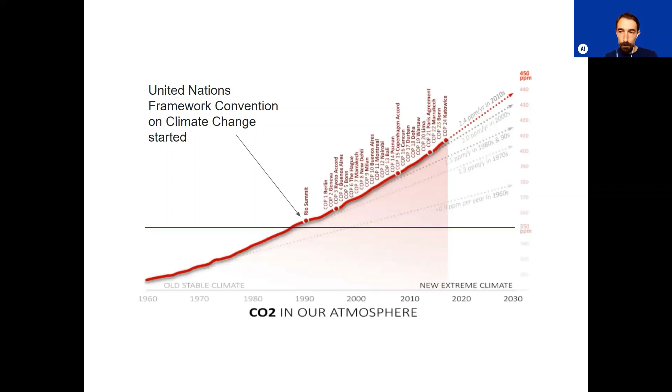So we've known for a long time, and after the Rio summit, the world's governments came together and formed the COP process, which is the Conference of Parties, attempting to reach some sort of international agreement to address this problem. And you can see that as these various COP meetings have happened, the concentration of carbon in the atmosphere has continued to rise on an exponential curve. So not very promising. And obviously we've seen some pretty terrifying effects of this, particularly over the past 2 or 3 years, and a palpable sense that political leaders are not dealing with the severity of the situation.

So in terms of architecture, there have been groups that have been active on this for more or less that same period of time that we've had the scientific consensus understanding of the problem, going back to the 70s. But they haven't had the kind of mainstream cut-through that will be needed for a wholesale transformation of society, really. So that was the impetus for starting a group like ACAN.

And initially we were quite inspired by Extinction Rebellion, also known as XR. In April 2019 in London, XR really almost came out of nowhere and put the climate emergency on the media agenda, on the political agenda, and did that in quite an effective way that's really almost unprecedented on this issue. So a few of us started having meetings over that summer, thinking about, could we have a group that takes some learnings from XR, but brings that activist approach into the profession, into our industry.

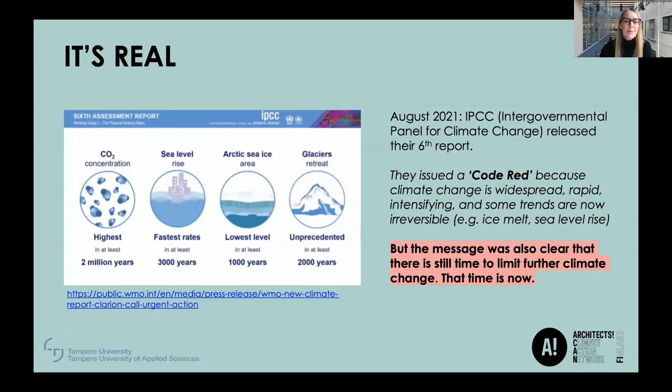Oops, for some reason, slides are not moving. Oh, okay.

The next reason why everything needs to change is because it's here, even in Finland. So climate change is already with us. For example, in Finland, we have already seen a 2.4 degrees Celsius rise compared to the industrial age. And globally, we're already at 1.2 degrees Celsius. And remember, we're trying to contain global warming to 1.5 degrees C. So we're not far off. The reason with Finland is because the Arctic, and also around the equator, is differently affected. So the global warming effect isn't even across the whole world. And so particularly in summer, there's an expected rise of 3 to 4 degrees Celsius by the end of the century, and as much as 8 degrees in winter. And we've already seen in some seasons 5 to 6 degrees in winter.

I'm having some trouble. I wonder if this is my end. When I click, nothing happens. Okay, let's see if my, yeah.

So in Finland, not just warming is an issue, but it's also a combination of changes. For example, we've also got an issue with sea level rise in the south, but because of the retreat of the heavy snow and the ice caps since the glacial time, the country is still slightly moving up. So Finland and the Nordic region aren't massively affected by rising sea levels, because the land is still slowly going up as sea levels rise. So they offset each other a little bit. But of course, in the southern region and around the archipelago, that's where we will actually have territorial loss, even in Finland. We are also facing superstorms, same as other areas in Europe, and they will increase and also raise the water level.

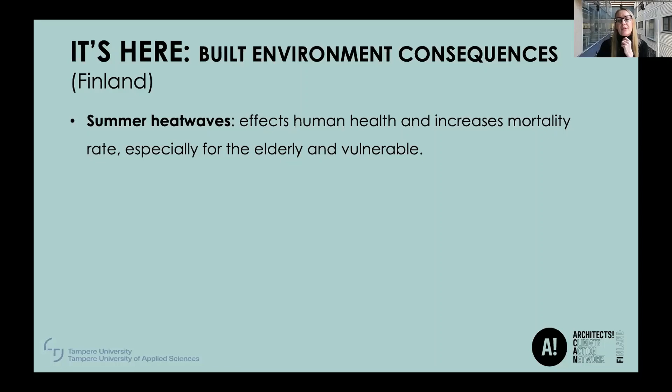And so what are some of the built environment consequences? Well, obviously, if there's summer heat waves, it affects human health. It also increases mortality rate, especially for the elderly and vulnerable, and even in Finland. And that's just because a lot of our buildings aren't really designed, and often people don't know really what to do. So I think it was in 2018, there was around about 300 excess deaths in Finland alone. And in Europe, there were several thousands from the heat wave.

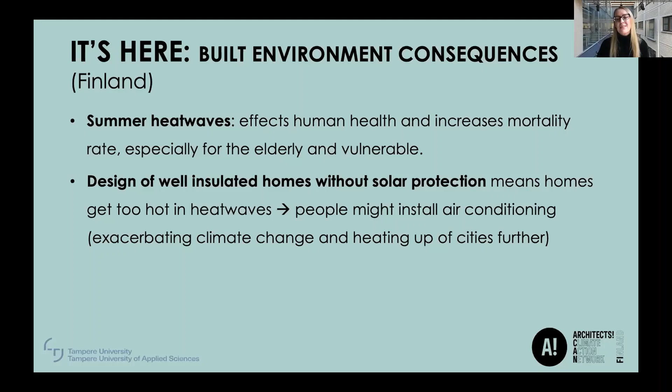And so, as I said, we have these well-insulated homes because we have the cold winters, but often we don't have solar protection. And that means that then you have a lot of sunlight coming in, and then the homes get too hot in heat waves. These are also issues that are actually observed in Germany and in the UK as well. And so then as a result, people might either be uncomfortable, their health suffers, or if they can afford it, they might install air conditioning, which then further exacerbates climate change and then heats up cities further as well.

Other consequences: when we have wind-driven rain, which in Finland isn't at the moment a huge problem, but if that happens and it keeps a facade wet for longer, and it's not designed for that, and of course, also internally, a more humid climate increases moisture problems. It can lead to mold growth, transfer of damp coming into the inside, that then also affects human health and well-being.

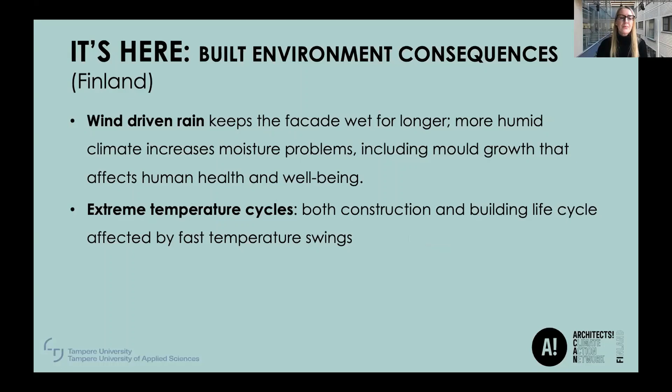The other thing is also when we have these extreme temperature cycles, so when we have very fast sort of freezing and thaw cycles, not only actually when you have ice on the roof, when it melts, it creates ice, it's heavier, and that then creates potential structural issues, but also it really affects actually the construction and building life cycle with these fast temperature swings.

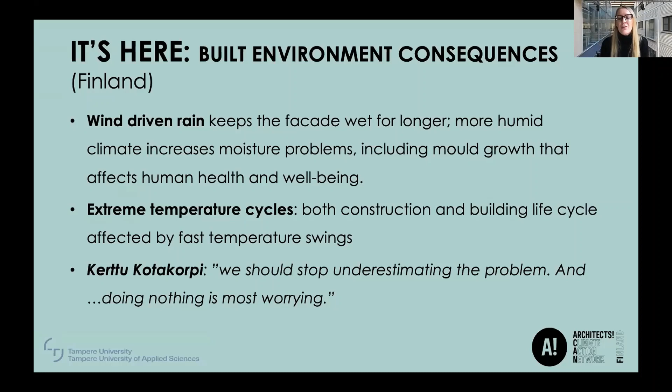And so Kerttu Kotakorpi said we should stop underestimating the problem, and doing nothing is most worrying. And so she was really pulling the alarm bell as well here in Finland. And so it's clearly urgent. It's basically real, it's already happening, it's with us, and it's urgent. The IPCC said that unless there are immediate, rapid and large-scale reductions in greenhouse gas emissions, limiting warming to 1.5 degrees C will be beyond reach.

The other thing is, of course, is at scale. We have to really act at scale. I mean, Finland has announced they want to be carbon neutral by 2035. As Tom was saying, in a way, these far away kind of deadlines don't make a huge amount of sense, because then we don't do anything and we think we still have plenty of time. We have to really cut now.

Of course, 2035 is actually now only 14 years away, and every single country, continent needs to actually move towards this carbon neutral society, and it's across all aspects of society that are impacted. As you probably have seen these numbers before, 36% of carbon emissions in the EU are associated with the built environment, and countries cannot be carbon neutral without also the built environment urgently transforming.

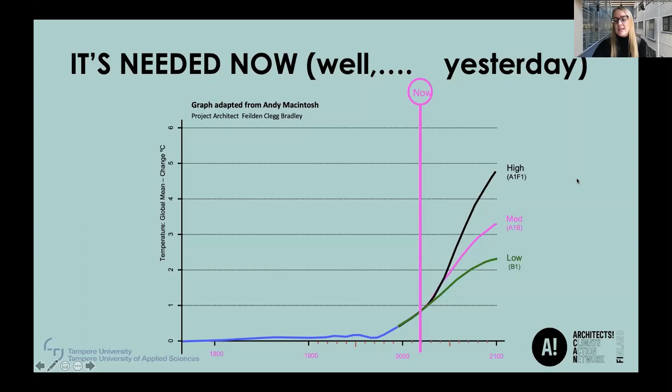At the moment, we are actually hitting at the end of the century high to medium high global warming, and that means somewhere up to between 3 to 5 degrees Celsius rise. And we're obviously trying to keep it below this 1.5 to 2 degrees maximum, and that's because that's the estimate that then the West Antarctic and Greenland ice sheets would not be melting, because when they do, that will give us 3 to 7 meters sea level rise, affecting huge amounts of people in coastal regions, and yeah, it's really severe.

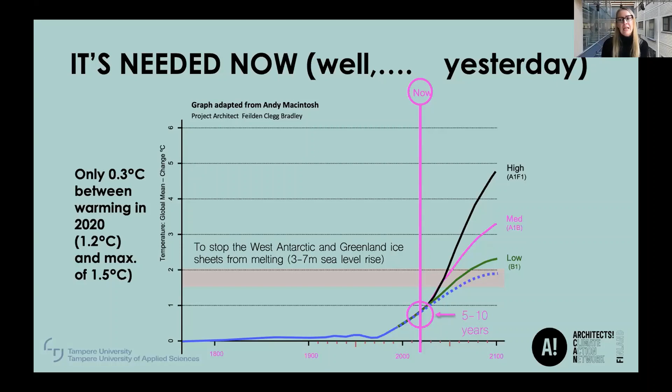So this is what we're really trying to do, to stay below this 1.5 to 2 degrees Celsius, and we just have basically no real time to act. We have to really do things now, not in the future anymore. And as I said at the start, if we already have global warming of 1.2 degrees Celsius in the last 100 or so years, there's only 0.3 degree difference between that warming, and this was in 2020, to not hit our ideal maximum of 1.5 degrees. So we really have to act now. And that's because we can still shape the future as well.

And then one other really important reason why everything needs to change is that we have global responsibility. So we have this global responsibility, each of us as individual citizens, but also as architects, because the decisions we make, whether it's material specification, whether we're going to demolish or build something from new, how much energy will be needed by people to use the building, all of that actually affects people and other species thousands of miles away. So the impact we have from decisions in Europe, in Finland, in the UK, and wherever you're calling from, actually has an impact on other people.

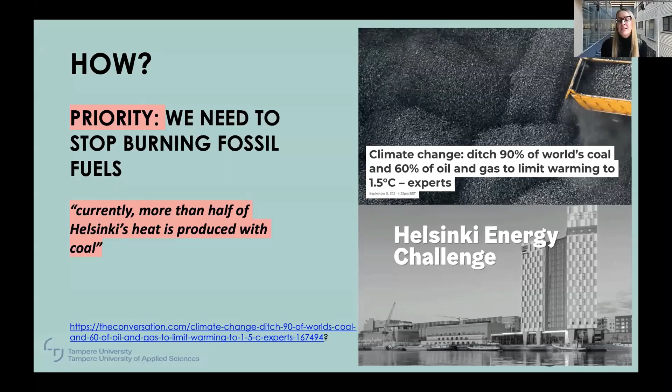And this top image, actually from yesterday, shows you that scientists were saying that we need to ditch 90% of the world's coal, 60% of oil and gas to limit warming to 1.5 degrees Celsius. And of course, that also includes transportation and so on. And that's why we have this focus on energy and carbon.

Operational carbon means building energy consumption, which is still the majority of where the energy and carbon emissions are associated. And then we've got embodied carbon, which is 10 to 30% of the building's footprint. Of course, if we're reducing operational carbon, proportionally it will become more important and will go up. Briefly, embodied carbon is that for the extraction, manufacture, transport, installation of construction materials, but also maintenance, reuse, demolition, end-of-life issues, and so on.

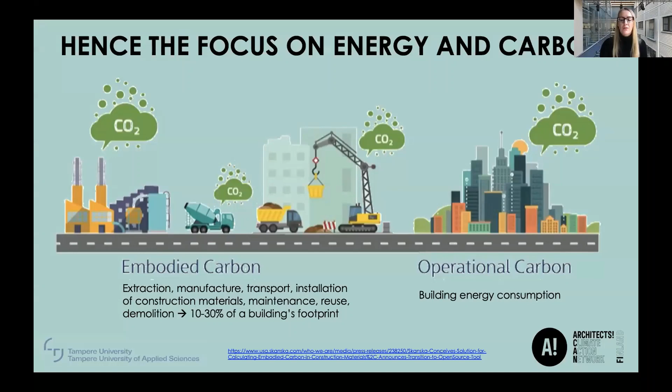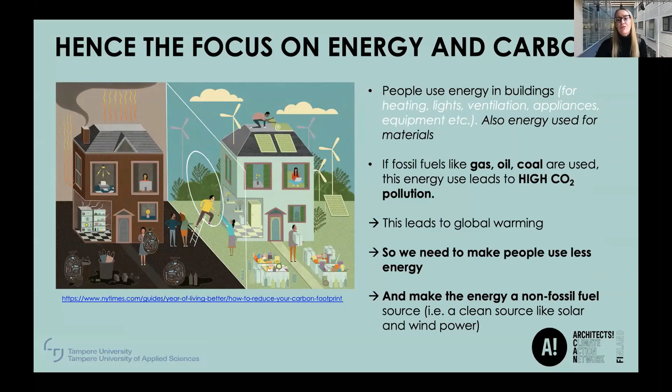So clearly, people use energy in buildings, but also for materials, and for heating, light, ventilation, appliances, and so on. And if we then use fossil fuels like gas, oil, and coal, then we end up with this high carbon emission pollution. And that then leads to global warming. We need to make sure that people use less energy, and then make the energy a non-fossil fuel source, so a clean power source like solar or wind power.

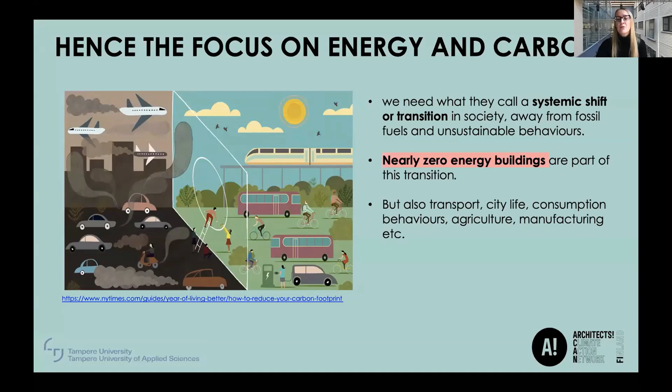And that's why we're referring to this systemic shift or transition in society that's needed. It's really a whole move away from fossil fuels and unsustainable behaviors. In a sense, we are addicted to fossil fuels because everything we do is based on fossil fuels, even a lot of the clothes we wear, not only the manufacture, but even the products they contain. Nearly zero energy buildings are part of that transition, but we're also talking about transportation, city life, consumption behaviors, agriculture, manufacturing, and so forth. So it's, as I said, across the whole of society.

But what's also really important is if we're really trying to avert the climate crisis, of course it is all about CO2, but it's actually about more than CO2. I would like to use this quote by Lance Hosey, an architect in the United States and the author of Shape of Green, which I highly recommend you read. He says: imagine a day when we've perfectly solved the challenges of energy, resources, and emissions, and everything we do and make is clean, harmless, and infinitely renewable.

Is that enough? The point he's making here is: what are we trying to preserve? Why are we trying to preserve our happiness, our way of life? How can we do that in a clean way? And if we are only preserving our subsistence and our survival, maybe that isn't enough in itself. So that's why it's also about more than CO2.

So as we're transitioning to this carbon neutral society, it's really important that we also take into account all of the other aspects that matter in life and that give us the society that we have. And so energy and carbon reductions on their own are not enough. Yet at the moment, that's really what we're focusing on because it is so utterly important because of this climate crisis that we're facing.

But there's other issues. Of course, we need to adapt to climate change, but we also shouldn't forget about daylight and the health and well-being impacts from that. Also, the finite resources that we end up using, including the waste that we create and the water that we use, not just materials.

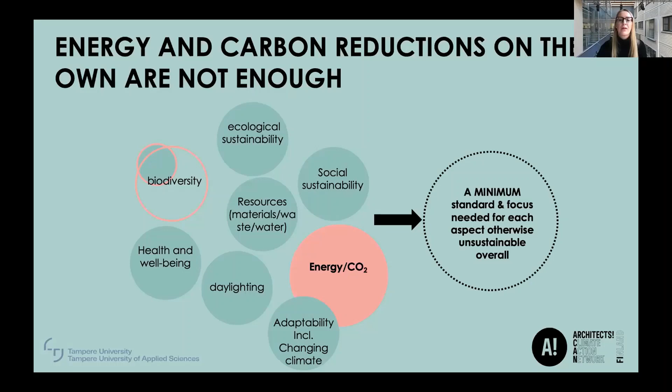We've also got social sustainability to consider, ecological sustainability, and of course also biodiversity. And there's many more of these issues. And as I said, most of the time we really focus on energy and CO2. And while we can prioritize energy and CO2, it's not okay when we then reduce high standards elsewhere. So it's actually not okay when, for the sake of energy and CO2, we neglect biodiversity or health and well-being. So we need this minimum standard and focus for each aspect, otherwise it's unsustainable overall.

We not only need to think more holistically, but we also need to think more restoratively. So it's really about undoing some of the damage of the developments we're currently creating, but also some of the past damage. There's also another reason why it's always good to think restoratively and try to create this positive change, because we're finding that a lot of proposals, buildings and developments that we undertake don't actually perform the way we expect them to. In reality, they perform worse. So that also gives us some kind of safety margin, but it's also about really offsetting previous damage that we've done.

And again, some of my students have seen this before. If you're here, my apologies.

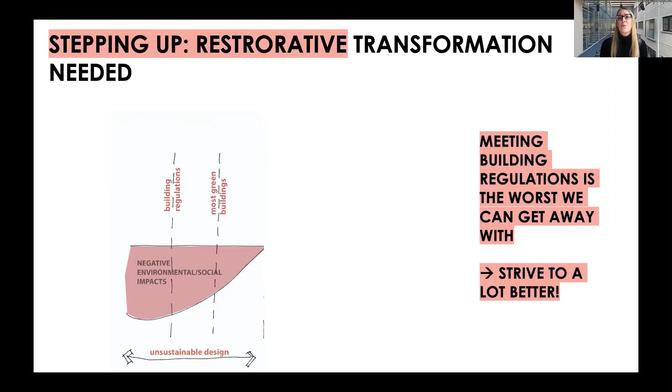But I really can't emphasize enough that often in the last 10, 20 years we talked about small changes we would make, and we'd say, oh, let's aim for 10% better or 25% better than the building regulations, and we call it a green building. But if you really start to look at those buildings and study them, they're more sustainable than others, but they're still an unsustainable design because they usually still have negative environmental and negative social impacts as well. And of course, building regulations are the worst we can legally get away with. We need to do a lot better than them and strive for a lot better.

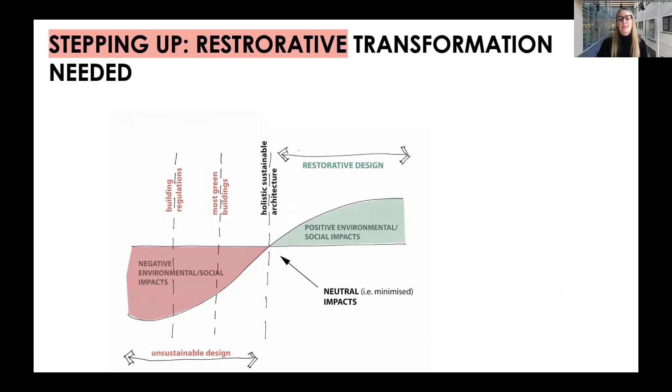So where we have sustainable architecture, we've sort of neutralized and minimized the impacts. But really where we need to go is this restorative design where we have positive environmental and social impacts. And we try to, as I said, offset some of the past damage and try to repair and restore. I've been referring to it as super architecture because we're asking a lot here. So super architecture is really design that can support or hinder sustainable behaviors and lifestyles. And I think when we realize the power of design to really nudge our behaviors, that's also when we move from climate anxiety into positive climate action.

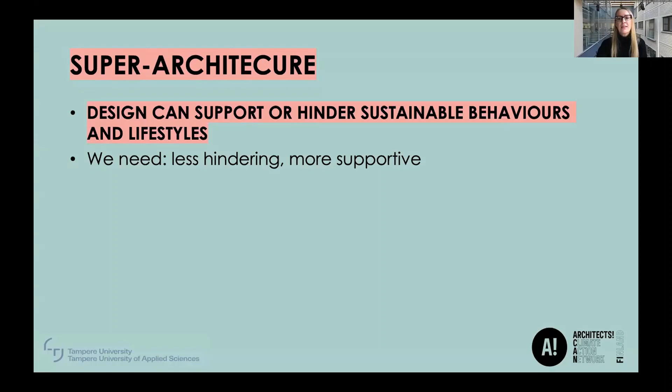So we need a lot less of this hindering, where architecture might hinder sustainable behaviors and lifestyles, and be more supportive and more restorative as well. And there are these opportunities to make an influence at different scales. As I said earlier, it's about urban, physical, energy, organizational, and social infrastructure. I'll now cover each of these very briefly and give some examples of how, at these different scales, design can support or hinder sustainable lifestyles. My time is very limited, so the picture I'm giving you is not complete, but hopefully it gives you some idea of the power of design at these different scales to create restorative design.

If I'm pausing and I look funny, it's because I have problems with my own laptop moving the slides around, which is slightly strange.

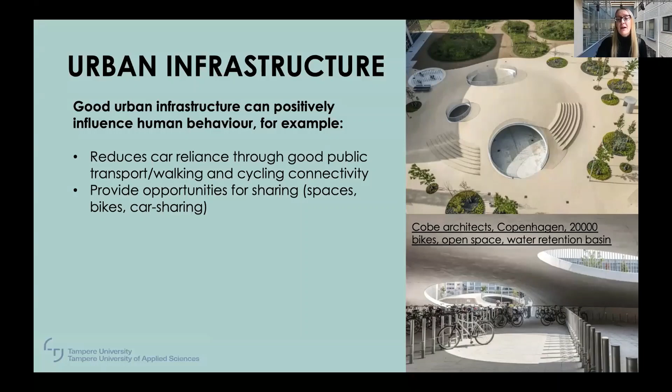So with regards to urban infrastructure, good urban infrastructure can positively influence our behavior. Some obvious examples: it reduces car reliance through good public transport, walkability, and good cycle connectivity. We can provide opportunities for sharing of spaces, sharing of bikes, car sharing and other facilities. We can include other facilities nearby that can be easily reached. And it's also about designing connectivity to urban green spaces and leisure, and all of that supports well-being as well. If we don't provide it, citizens simply cannot use it.

So, we cannot guarantee that when we're trying to nudge people in a certain direction, that they will be nudged that way and they will behave that way. But at least if we provide the opportunity, they at least have the option to take that opportunity. So the nudge architecture principle is really about encouraging citizens to make more sustainable choices and/or healthier choices.

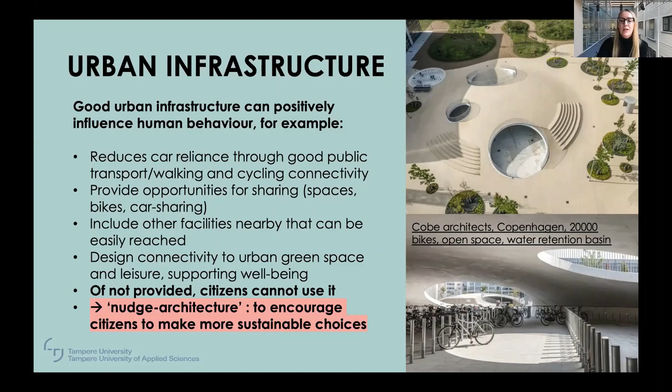The projects you see on the right are in Copenhagen, the university. They've got space for 20,000 bikes. It also creates this open space, slightly lifted off, and this bike storage also creates this water retention basin, because Copenhagen is also at risk of flash floods already, but also, of course, storms and issues with sea level rise as well.

Another example where urban infrastructure can really create change is that it's not just about new urban infrastructure that we create, but also transformation of existing cities. And actually everything we have already is going to be our big challenge to transform, our cities and buildings, but of course there's also inherently often a more sustainable approach to it, because we work with existing resources as well.

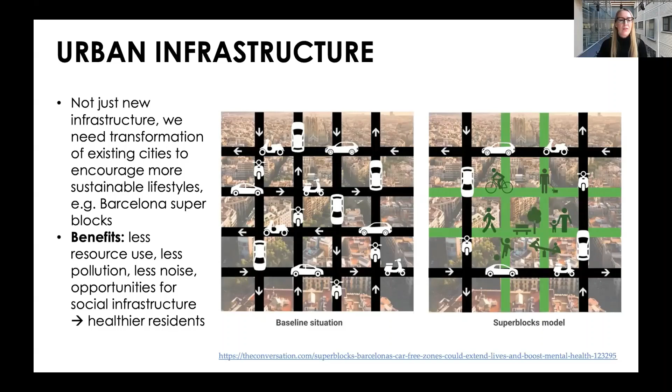And the Barcelona superblocks are one example, where they've tried to create these superblocks whereby the motorized transport and the pollution and the noise is moved to the perimeter, and then the internal spaces are given over again to people and the community that they can then use for leisure, social infrastructure, and greenery as well. So it can encourage more sustainable lifestyles, and if it's safer to walk and less noisy, then it actually affects people's health and well-being, and we encourage active lifestyles. So as I said, less resource use, less pollution, and healthier residents as a result.

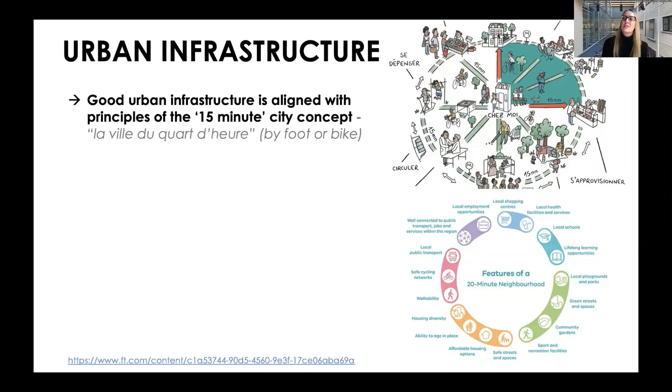Then we also have this principle of the 15-minute city, because good urban infrastructure can really ensure that we can move around by foot or bike really well, and that everything is nearby us. Now, of course, mixed-use developments have been discussed since Jane Jacobs' time several decades ago, and now with COVID, a lot of cities have been signing up to this 15-minute or 20-minute neighborhood because they realize that not having to commute, having everything near home, not only supports ecological targets, but also people's health and well-being.

So the idea is that you can basically within 15 minutes walk or cycle from your home, even if it's then to a transport node that takes you to work as well. It's also the idea that it helps provide social infrastructure.

The one danger with these kinds of developments is that this often goes together with densification of cities, and also these hybrid functions. You have a bakery, workshops, community spaces, health centers, homes, green spaces, mobility connections, everything very close together, and developers might use this to overly develop the land for economic gains, without really balancing housing with other functions. So the idea is not that this is purely a high-density housing development, but it has to be combined with these other facilities that are very walkable in that neighborhood.

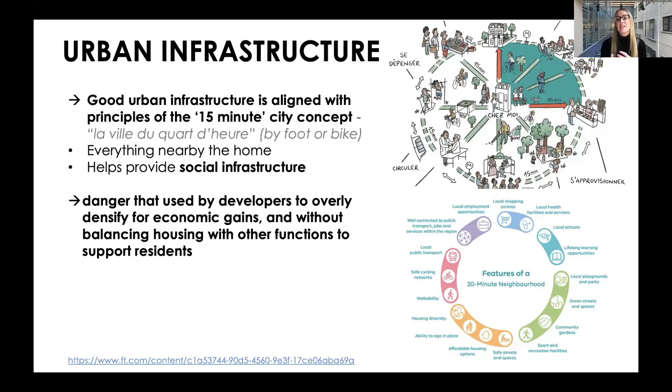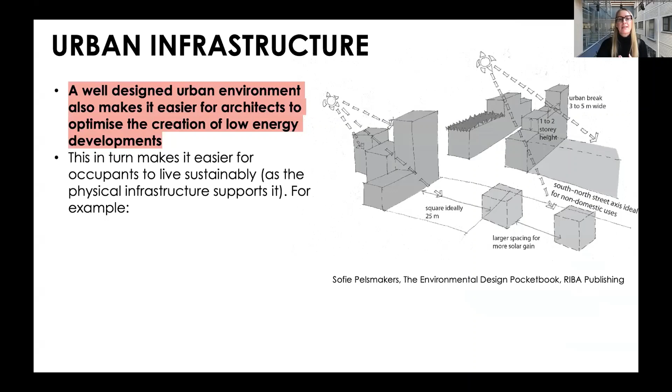Another aspect of urban infrastructure is that there is a significant impact from the urban onto the individual buildings. So if you have a very good urban plan, it can really affect the actual energy use of the buildings that architects later have to plug into and design on a smaller plot. One example is what I call the development of these urban breaks. As you can see in this diagram on the right, it's about really considerate urban design that makes it easier for occupants to live sustainably, as the physical infrastructure supports it.

And so these urban breaks can create this pleasant microclimate. It reduces urban canyons where you have these major winds coming in. It also can minimize the urban heat island effect because there's enough wind speed to take the hot and polluted air away as well. And it's really about creating differences in story heights, so more living spaces can face south, but they can also have different directions for better daylight, better connection, and also bringing sunlight into open spaces behind as well.

Of course, there's another implication to this: if we're building with a greater form factor, so less compact building form, we have increased heat loss. So all of these need to be carefully offset as well.

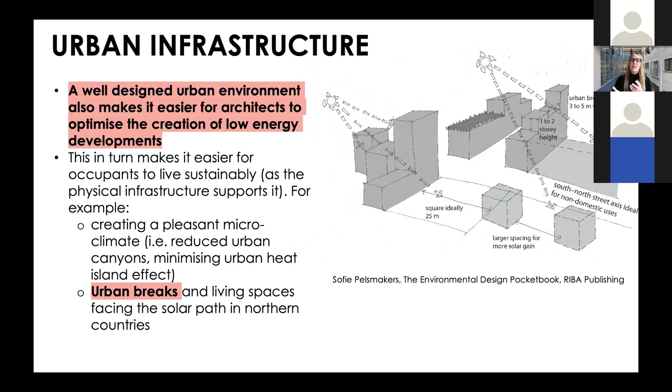But that's also at these different scales, so that if we do this at the larger scale, we can then also more easily incorporate it in a more restorative way at the block scale as well. And these continuous green corridors or green bridges are really important because when we're talking about biodiversity, a lot of species cannot actually cross roads, they don't fly.

So we're otherwise really genetically isolating them in certain regions. Their food supply, what they predate for their survival, is then limited, but also their own genetic pool becomes limited as well. So it's really important that we link these spaces rather than looking at it at a building block scale.

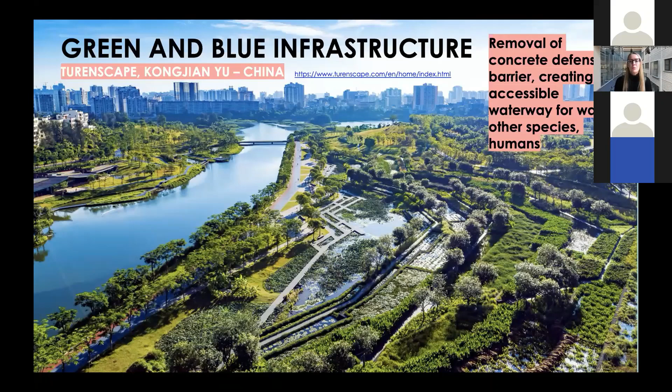But you can also see the scale of that transformation, that it does mean removing all of those concrete barriers, making all of the river accessible again for other species, also human beings, and really re-landscaping all of this very carefully. As one example.

9 minutes. Okay, thanks.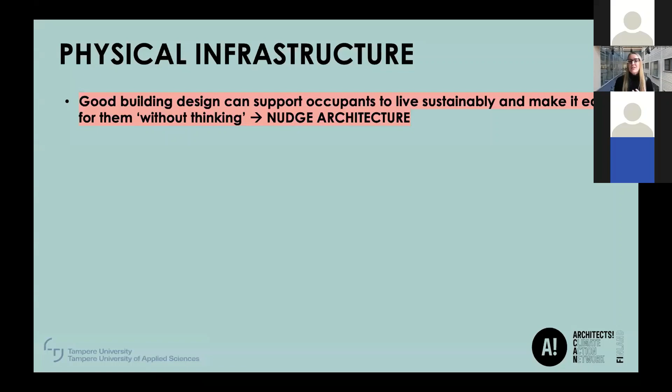That brings me to physical infrastructure. And again, I want to give some examples of how that can support or hinder sustainable lifestyles. So with good building design, we can support occupants to live sustainably and make it easy for them without having to think about it. An example I want to use is by a colleague at UCL, who did a PhD on this.

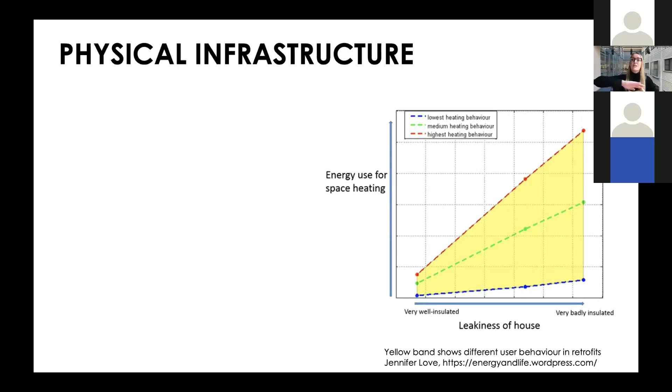But in the same well-insulated building, this is actually housing, somebody with high heating behavior uses quite a lot more energy than someone with medium or low heating behavior. But when they live in a badly insulated house, that heat demand massively goes up. So the lesson is that high fabric efficiency standards are very robust to different user behavior.

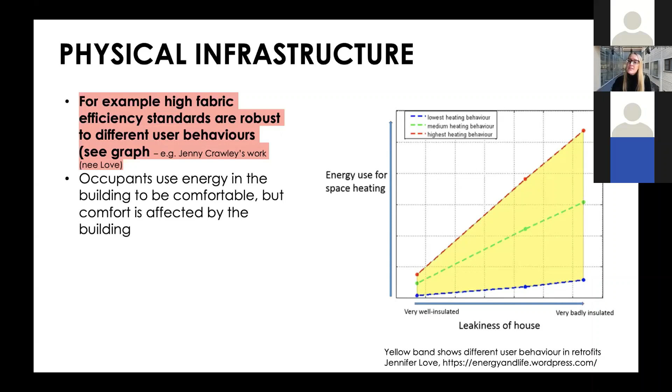So it means that if we insulate really well, even if somebody starts heating to 23, 24 degrees inside the house, it's massively contained and the carbon emissions will be lower from properties like that compared to when they're very badly insulated. And we cannot influence people's heating behavior very well.

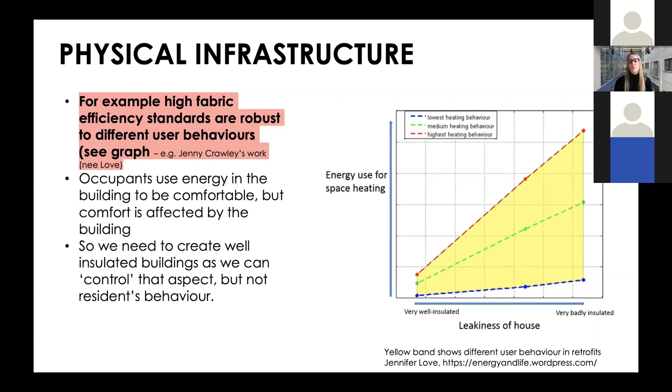Although there's some nudge architecture that we can do, like apps, that's also why it's so important that we insulate the buildings really well, because we can influence that, and you can see what influence it has. It even allows that bad behavior, if you like, but still the impact is much more reduced than if we didn't provide this physical infrastructure.

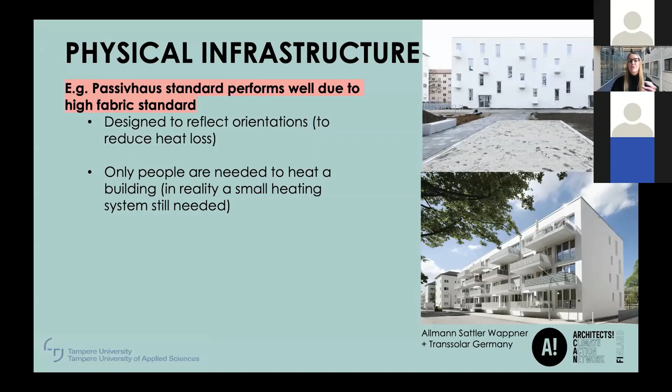Of course, in reality, you still need a small heating system for those few days or weeks, depending where you are in the world, that you still need some top-up heating in winter. And sometimes, actually, in other countries, you need some active cooling as well in summer.

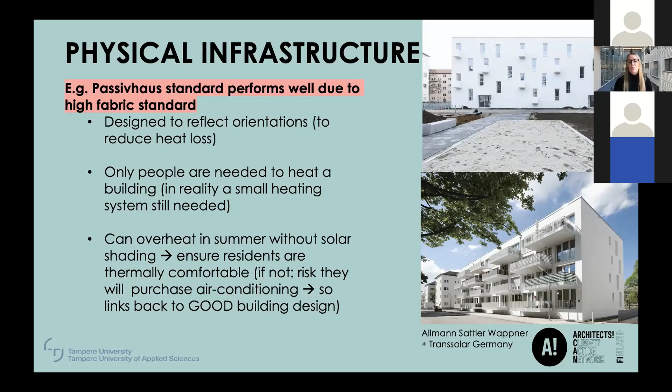What we need to be careful of, of course, is when we are designing, and particularly when we're retrofitting, when we're upgrading existing very badly insulated buildings to make them better insulated, that they can overheat in summer unless there's solar shading. So we need to make sure that residents can be thermally comfortable. Otherwise, again, there's a risk that they're not comfortable, their health is impacted, or if they can afford it, they could start installing air conditioning, using more energy that way. So we really need to do good solar design.

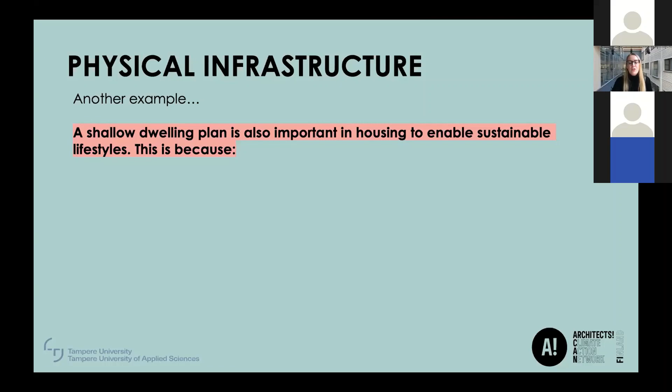Another example is that of the shallow dwelling plan. I'm noticing that in Finland especially, but also in other countries in the Nordic region, we're building more and more deep plan housing blocks, and they're very efficient and economic to build, but they actually don't enable sustainable lifestyles, while shallow dwelling plans do. And that's because when we have shallow dwelling plans, we can have good daylight. That means we don't need as much artificial light on, and then it reduces the associated energy use.

The other thing is also, if we have more shallow building plans, we can actually have more adaptable plan layouts. You can divide rooms much better because you don't suddenly end up with a space with completely no window ventilation. And of course, that also then supports social infrastructure in the community, because residents can stay when life situations change, so they invest in their community.

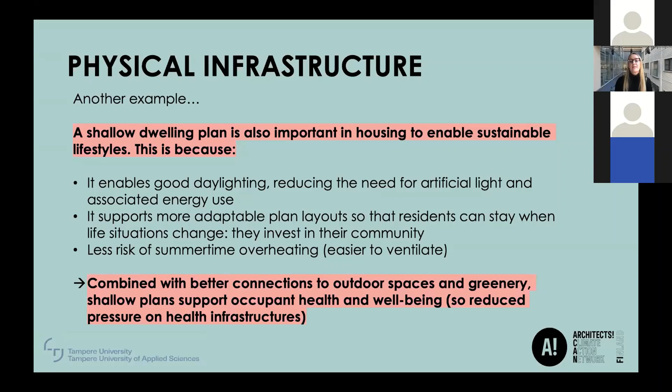Also, shallow plans usually have less risk of summertime overheating because it's easier to actually ventilate spaces. And if we then combine these shallow dwelling plans with better connections to outdoor spaces and greenery, then we really can support health and well-being better. And that then also reduces pressure on health infrastructures.

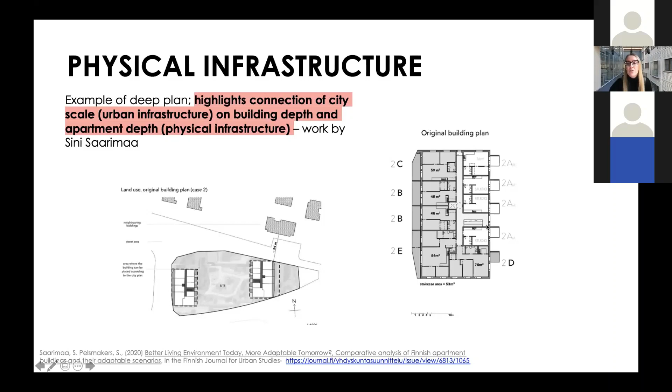An example of this is work done by our wonderful colleague, Sini Saarimaa. And this is an example of a deep plan on the right. This is actually an actual proposed project. And you can see on the left here the dotted line that shows you the city plan, and how the architects, in one case of the block, less so in the one on the right, built almost directly to the permissible buildable area. And you get these very deep block plans with a long corridor, only one stair core, and you get mostly single aspect dwellings in this case.

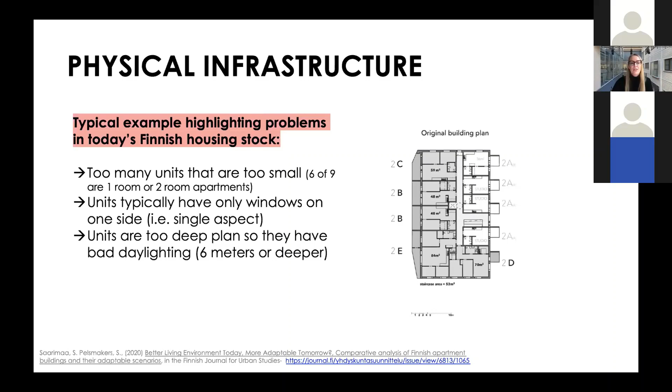And this is actually quite typical of what's happening in Finland. First of all, there's too many units that are too small. 6 of 9 are 1 or 2 room apartments. As I said, they're single aspect, and they're also very deep planned. They're 6 meters or deeper. Sometimes they're 9 or 10 meters deep and only have windows facing one way. They're also, because of that, very inadaptable.

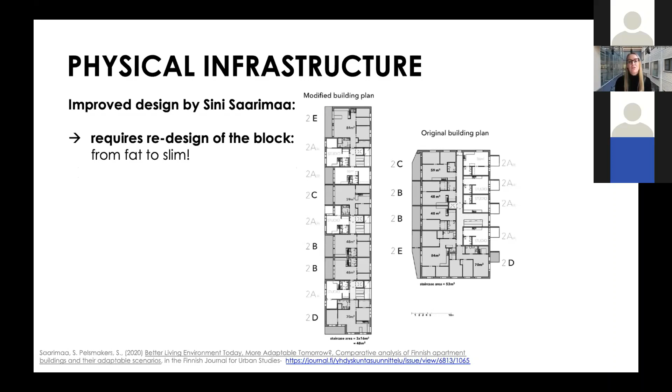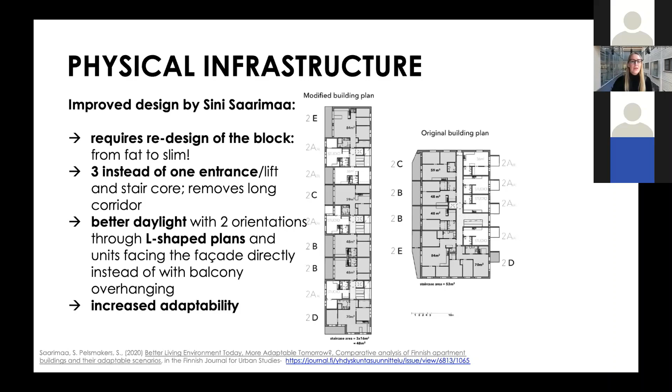And she ended up redesigning this block to a much slimmer block. There's 3 entry cores, so it goes from fat to slim. It removes this long corridor, and there's much better daylight because of the shape of the dwelling. We also don't always have a balcony. There's almost in all cases double aspect. And it increases adaptability because of that as well.

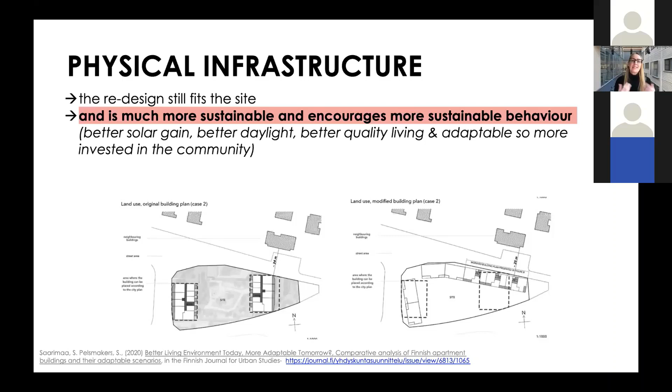Yes, there will be a slight energy penalty as well from heat loss, and it is one of the things that Raul and colleagues and I are looking at, understanding what those implications are. But as I said, it gives better solar gain, better daylight, better quality living, it's more adaptable, so people will be more invested in the community.

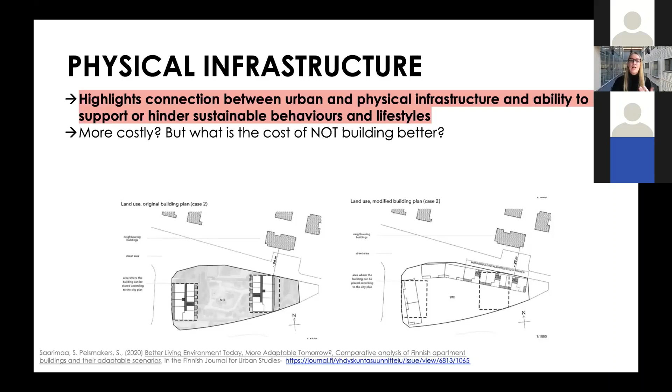And this really highlights this connection between the urban and physical infrastructure and the ability to support or hinder sustainable behaviors and lifestyles. Of course, the critique will be, well, it's going to be more costly. We do need more materials, and that affects embodied energy. But the question we also have to ask is, what is the cost of not building better? Because there are financial implications also to the environmental, social, health and well-being costs of unsustainable designs.

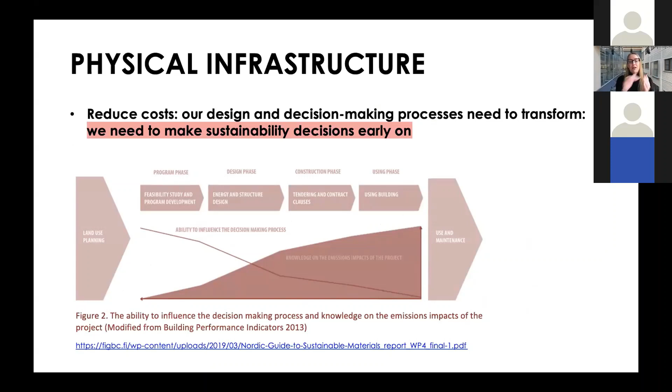So with regards to cost, we basically need to start making a lot of these sustainable decisions very early on. And this graph shows you that if you make decisions very late in the process, it actually becomes very costly. And that also relates back to the challenge we're going to have with regards to embodied carbon. We need to reduce the embodied carbon of our materials by a minimum of 65% in less than a decade. Now, how are we going to achieve that?

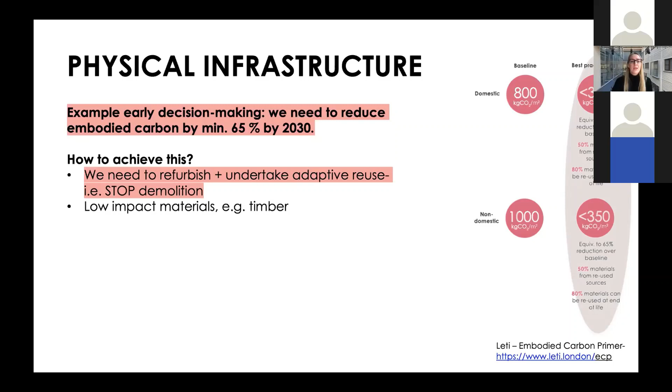First of all, we need to stop demolishing and refurbish a lot more. We need to use low impact materials like timber. We need to use reclaimed materials. 50% of materials should be reclaimed from somewhere else, including timber. And 80% of the materials that we include in the actual construction should be kept for circulation so that they can actually be reused again. So we need to design for disassembly.

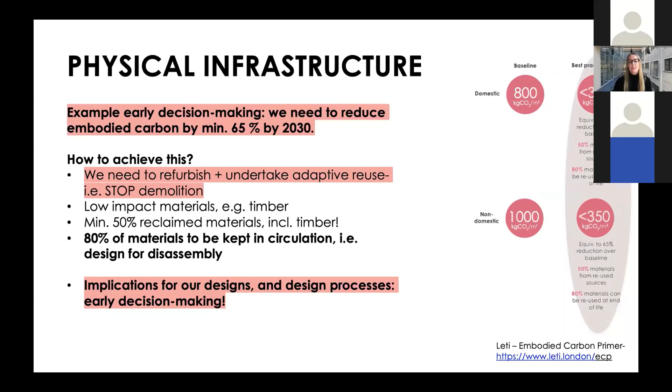But I don't see this change happening yet in architecture at any big scale, because I don't think as architects we realize how we might do this and the importance of doing this. But clearly it has implications for our design and design process, because we then need to know what materials we use very early on to adapt our designs to that. So this early decision making is really important. Here are some projects you can see. Lendager Group are some of the ones that have been looking at this, and also the EU headquarters used some of these recycled components as well.

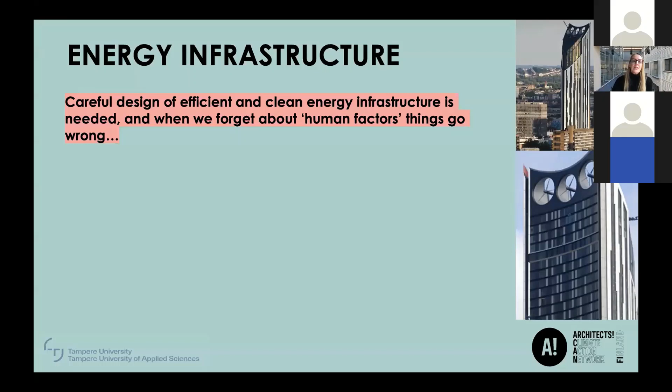Energy infrastructure. Very briefly, careful design of efficient and clean energy infrastructure is needed, but we should also not forget about human factors and things that can go wrong. Very quickly, this is the Strata Tower in London. I've never seen it turn. I might ask Tom if he's seen it turn since I left. The reason is that it was quite expensive, but it also makes noise and vibration. It was switched off overnight and it never produced electricity. And it's likely that it might even have created more embodied carbon than it ever gained.

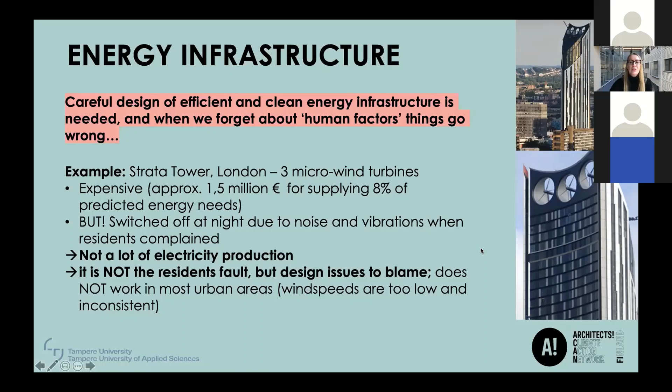And that's because these kinds of technologies, even at a high level, at story level, don't really work because we have too inconsistent wind speeds in cities. So we also need to be very careful as architects. It's good to do blue sky thinking, but let's also get real. We need to save carbon emissions for real, not just on paper. I'm getting to the end of the talk.

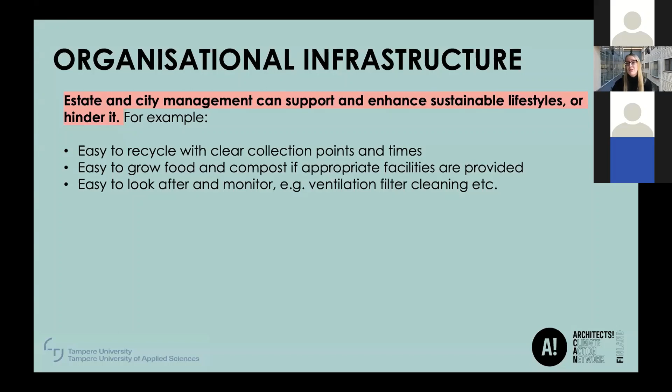Organizational infrastructure is also really important and something we often don't get involved with as architects, but estate and city management can really support and enhance our lifestyles or hinder them. For example, we can make it easy or difficult to recycle, depending on the collection points and times. We can make it easy to grow food and compost if appropriate facilities are provided. And at a building scale, we can also make it easy or difficult to look after new technologies, for example ventilation, filter cleaning, and so on.

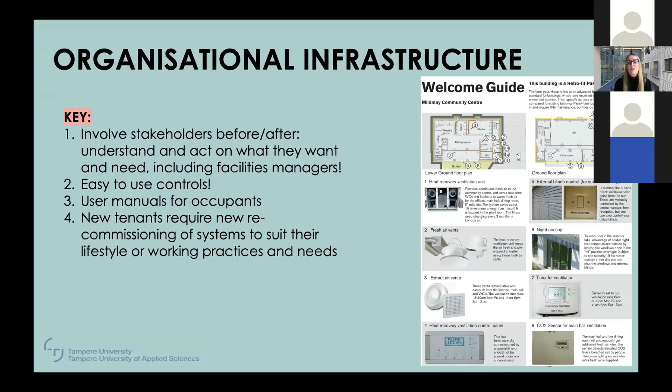And so what's really key is that we involve stakeholders before and after, that we work closely with them, and that we understand and act on what they want and need. And that doesn't just mean the end user who will live or work in the space, but also facilities managers. We need to make sure we've got easy to use controls, and as you can see here on the right, user manuals for occupants that are really easy to see and not 30 pages of a difficult to read document. And of course, every time we have new tenants, we need to recommission the system and perhaps run them through how things work. And so this is all about undertaking post-occupancy evaluation and building performance evaluation.

And if you had to go from one end of the building, rather than walk around the perimeter inside the building, in good weather, when it wasn't raining, it's easier to just cross the courtyard and take the fire escape to go in. But what nobody realized was that nobody had a key to the fire escape, so it was always locked, and then people propped it open, you know, put a wedge in between.

As a result, there was a lot of heat loss. People were always cold inside in that lobby space. The actual renewable energy heat pump or low energy heat pump couldn't actually meet the heat demand. So the backup boilers that were fossil fuel would kick in. And so as a result, the carbon emissions weren't achieved, and all of that because of just a lock.

Now that was only revealed because they noticed that the backup boiler was always kicking in. They could then find out what the reasons behind it were and realized it was that one fire door that was kept open, and it was a very simple kind of hatch that could be changed so that it could actually be opened and closed. And we only know this because of going back to the building and monitoring it and finding out what the problems were and why it did not work as expected.

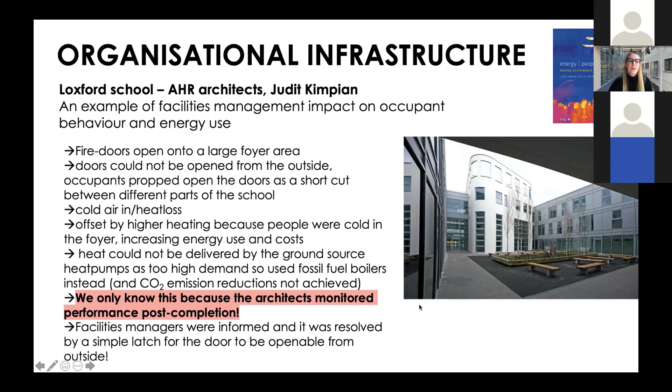So Eco-Viikki, similar issues, even in Helsinki where we've actually got very few studies, but also there we're finding that some of the energy use is not quite as expected. It's sometimes a little bit better, but often worse. And it's then going back and understanding and learning for our next projects as well. Of course, it's not just about carbon emissions and energy use, but also about indoor air quality, indoor environmental quality, and how people feel about these spaces.

And that brings me to the final larger infrastructure I wanted to cover, perhaps one of the more important ones as well, social infrastructure. And social infrastructure is really spaces and places that support community encounters. So it's, for example, a lively pedestrian environment, well-maintained parks, the bench, local commercial services, community spaces. So it's about this infrastructure that supports residents where they can meet, whether it's planned or just meeting a diversity of people they otherwise wouldn't come across.

And you can see a project in Paris that is very much a social infrastructure designed with and for and built with the local community by AAA. And so when we have that infrastructure, it encourages people to get together, they can support each other, it reduces isolation, and it's particularly important for older people and those that live alone.

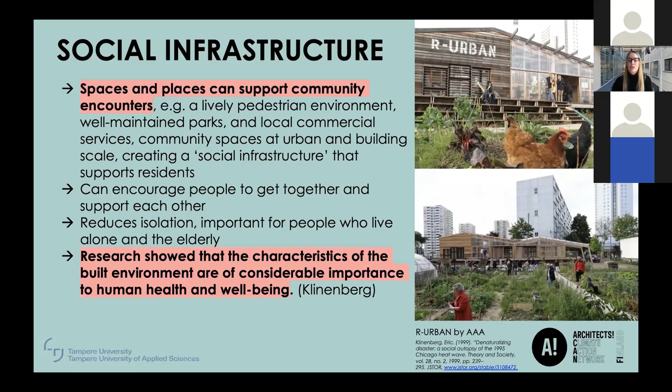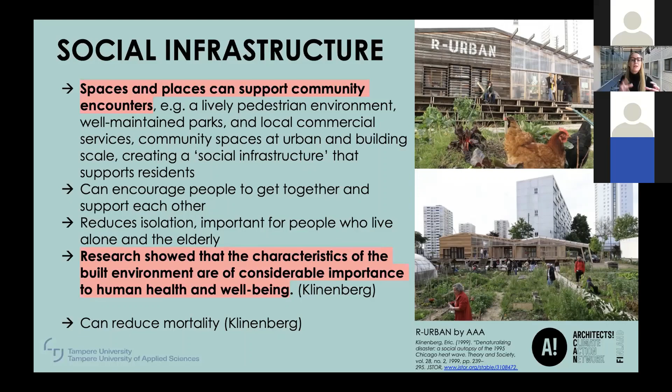And Eric Klinenberg did seminal work on this about 20 years ago. And he showed that it can actually save lives, particularly in a Chicago heat wave, when people could look after each other when they were part of a community. And so the built environment characteristics are really of considerable importance to human health and well-being.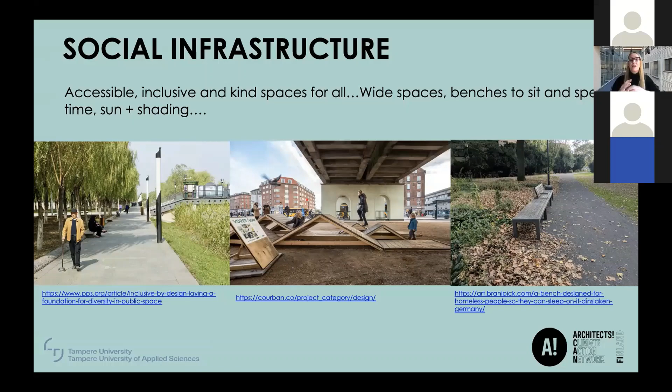Some examples here are a wide enough walkway so that people can pass each other but can also sit and linger. Some disused spaces that can actually provide the social infrastructure, and benches that are designed for people to sit on, perhaps even to sleep on for homeless people, rather than what we've been seeing more, this defensive and aggressive architecture with spikes and slanted benches, so people cannot spend any long time on it.

So one project I briefly wanted to show, not much time to go through, is in Malawi, this maternity village, and it's effectively where women go to wait before they go to the hospital. That's because they live quite far away from the hospital before they give birth. And there are huge health and well-being issues, and it puts the child at risk as well.

And so there are now 36 rooms, and a lot of what the architects focused on was the social infrastructure, because women wanted to be there while they're waiting to give birth. They wanted to be there to just talk and spend time.

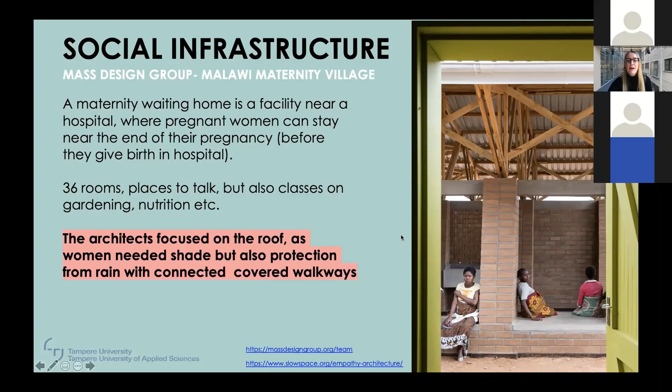And so the roof is very important because it protects from the sun, but also from the rain. And so a lot of these spaces are actually just about lingering seating areas, a connected kind of roof space that you can see here for actually the community to be. There's then also some guest rooms so that family and friends can come and visit as well.

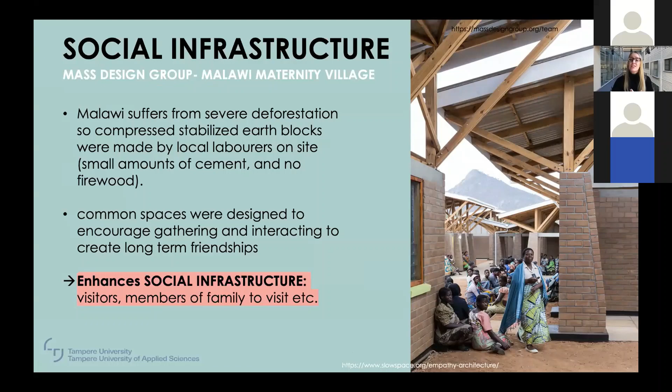And they also use local materials, unfired brick, wood and so on as well. So this really enhances the social infrastructure for both the women here, but also the whole community. And it's actually so popular, they don't have enough rooms. So yeah. And so that then leads us to health infrastructure, that all of this, what I described, has an impact on sustainable lifestyles, and can really reduce the pressure on health infrastructure.

We've just recently seen this with COVID, that there's been evidence of increased COVID-19 infection and death reported in the US, the UK, and Singapore because of people living in poor quality housing and overcrowded conditions. I haven't seen the link in Finland yet, but in Finland, I've seen the latest statistics, I think it's not quite 20%, it's 16% of people live in overcrowded conditions, even in Finland.

So good health and well-being is, of course, not just the absence of disease, but it's also about these social justice issues and an equitable carbon neutral transition that we have to pay so much attention to as well. And of course, any inequalities exacerbate health impacts in society, and you have hopefully seen how some aspects of designs can support or hinder that as well.

So in summary, we're part of the solution. And we can no longer do business as usual. No more of these small changes, no more of being a little bit more sustainable. We really need to significantly shift. And a lot of the things that I'm showing are projects that do certain things really well, but we need all of these projects to do all of those things really well. And so we can and must change our current way of doing things across all layers of society.

And for us as architects and urbanists and other people in the built environment, it means we have to change how we design spaces and places. I also think it means that we need to decenter ourselves. That means not designing for our own portfolio or for how we as peers judge our architecture, and that we need to center other people and other communities and the other non-humans first.

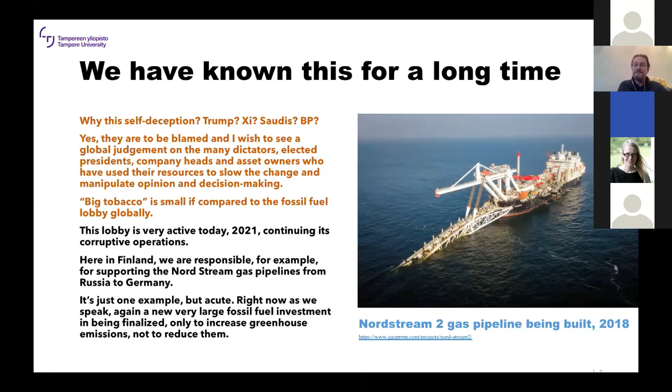For example, just to make it local, Finland has been supporting this Nord Stream project, which basically is a new set of gas pipelines from Russia to Germany. It's a very big investment, only to increase greenhouse emissions, not to reduce them. It's happening now in front of our eyes in the Baltic Sea. Clearly, it's complex, it's global, it's deeply imbued in political economy, in how global, international, national, local politics are intertwined with economy, with making our environment, including the built environment.

We are also in the era of so-called planetary urbanization. It's a concept from Christian Schmid and Neil Brenner. And I think Nord Stream is a quite good example. We are networked technically in many ways. And I think the notion of the Anthropocene is probably quite correct.

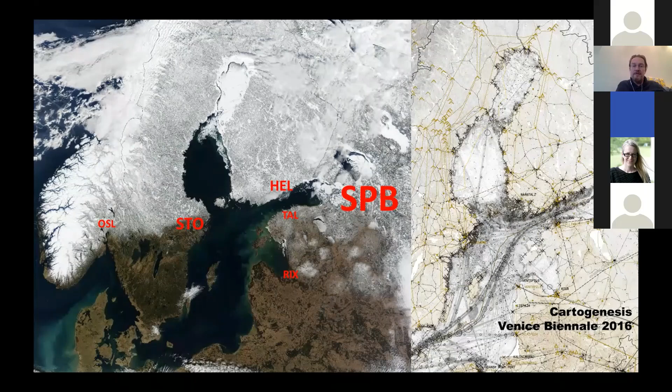Stephen Graham in Newcastle is at the moment working on the notion of cities being geological, because at the moment we, as humankind, are moving more material than the natural processes of Earth. It's quite amazing to think that mountains being raised because of the crust of Earth, big rivers moving sand, sea currents moving material, that's at the moment smaller than human processes that touch the crust of Earth. We are dealing with a very big and complex topic.

In Finland last year, emission trading was about 20 million tons of CO2 equivalent. There is a quite complex system to calculate other gases so that it matches CO2. And this non-traded, so-called effort sharing, was almost 30 million tons of CO2 equivalent.

Land uses, basically forests and wetlands, they are a big carbon sink in Finland because there is so much forest. So Finland is having more than 20 million tons of carbon sinks last year; in average of the last about 20 years, it has been a bit less, about 16 million tons CO2 equivalent annually.

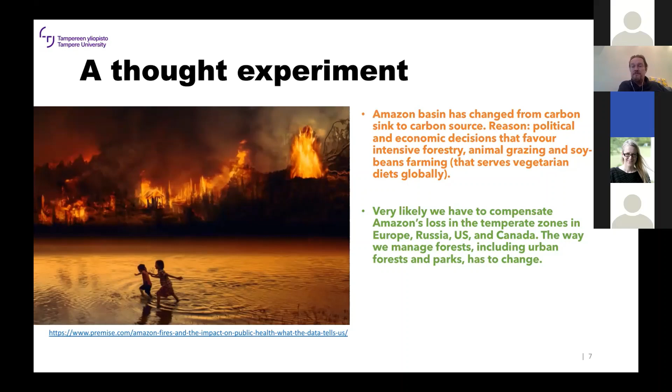And I think quite likely here in Europe, we have to compensate, for example, that loss and other global problems by changing the way we manage our forests. This is something for Sweden, Finland, but also Russia, Canada, these countries with big surfaces and a lot of forest. We have to change. That's the thought experiment. What it could mean for Finland.

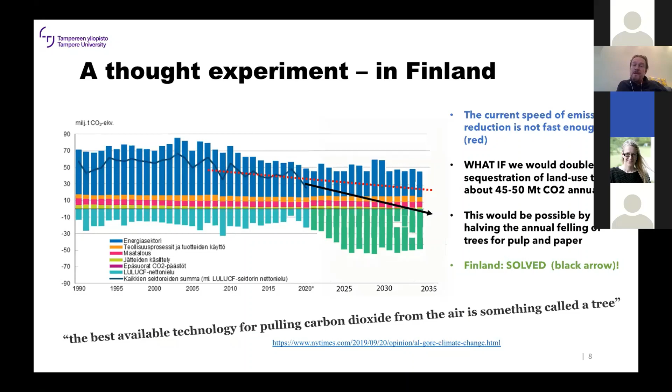And as we know, trees are the best way to sequester carbon. There's a link to one story in the New York Times, which is going through that in quite an interesting way. So this seems on paper quite possible. What would it mean in practice? It will be very good for biodiversity and the experience qualities of forests.

At the moment, the average age when a tree is felled in Finland is 70 years, and Finland is full of these terrible views of killed forests at the moment, even though the image of Finnish forestry is quite good. The reality is a bit different. This thought experiment of halving, reducing by 50% the felling, would mean that on average, a tree would live for 140 years.

And it's still quite a short life for a tree, because a pine can grow 400, 500 years in this Nordic climate and really grow. It would sequester carbon every year, 500 years. It would be a very, very good and sensible idea, in fact, from an ecological and social point of view.

Economically, of course, about half of pulp and paper factories should close. That would mean about 2% loss of gross national production for Finland, and a bigger loss for the export, because forestry is having about 12% of export for Finland at the moment. It would mean about zero growth for a certain transition period.

Is this possible? Is this a big thing or small thing? I leave that for all of us to think, but I think it shows a bit the scale of change for this kind of country that is maybe having quite a good position and quite good resources to fight climate change.

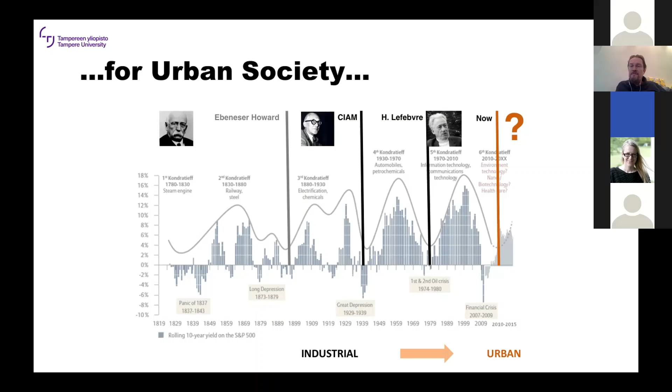It's not industrial anymore. It's qualitatively a different way to organize our common life. And how to plan for that? It's a question mark. At the same time, obviously, this change is unfolding under these multiple crises we are dealing with: climate, biodiversity, but also crises in democracy, why there is so much right-wing populism, crises in trust in government.

Kate Raworth has condensed that situation, I think, quite well in this donut diagram. We have an ecological ceiling, and we need to take care of the social foundation. We have quite a narrow space to operate, to reach this regenerative way to run our society, as Sophie was so well describing.

First, to add a bit to what Sophie said, I've been thinking a lot: can we design out climate change? There is almost consensus in planning circles that if you look back 150 years, about 100 years, many diseases, for example cholera, were designed out because of better sewage systems, sanitation, drinking water, more air to housing, a bit lower densities in working class housing, and so forth.

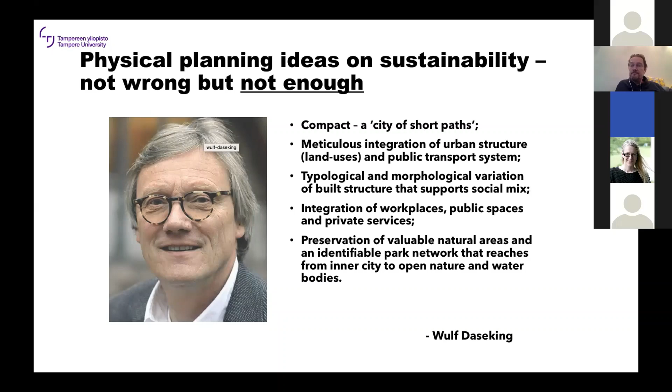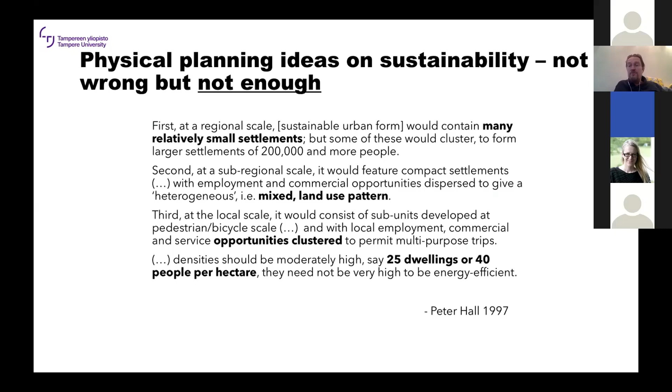Opportunities clustered locally, so that walking and biking distance works well. And then we had some ideas based on certain geographical analyses on the optimal density on the, let's say, lot or neighborhood scale. Good ideas, but not enough. So what more should we have? What is then the additional element in the planning agenda for future sustainability?

When looking at history, when looking at Peter Hall, modernist planning and so forth, you can say that history of planning is actually a story of economic theories that are interpreted, that are put in practice as normative spatial ideas. Garden city, modernist approaches, and so forth. This is quite clear, in fact. And if this is true, I think we need fundamentally new social, including economic, thinking to find new planning ideas.

So it should come from rethinking society, rethinking politics, rethinking how we are together as humankind. And that way we can get to the new agenda. I hope that in this lecture series we can develop ideas and start to kind of fill the gaps of this thinking.

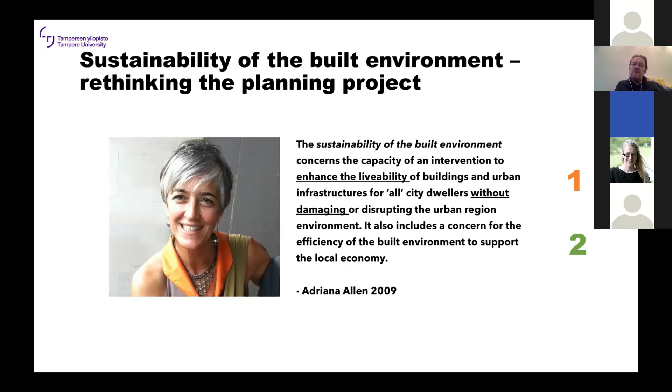It also should somehow concern the economic dimension. It's still quite broad. It's a very open definition, but from that, I think it's kind of one and two: enhance livability and do that so that also nature is winning. Nature, which is the actor without voice in these human processes. And any project should do that. So in that sense, it's about rethinking the planning project.

This was just a theme in one conference yesterday and today. There's a UK-Ireland planning conference happening right now, and they have this title, Rethinking the Planning Project. Any project should make urban spaces more socially inclusive, attractive, acceptable, inspiring, and make sure that nature gets something more. It's about regeneration in that sense.

How to do that? I wish that we can develop many more ideas, but clearly very important to me is revaluing and protecting public good. We have seen a long time of very profit-driven neoliberal urban development. In some countries less, in some countries more, but clearly this public dimension, public good, common good. What are we gaining together? What is shared in the city, and what is adding value, adding quality of life, making every life better? We should revalue and find local, regional ways to protect that from economic exploitation.

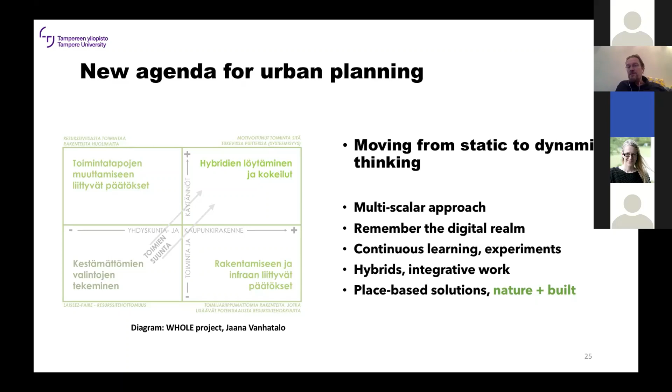And I think this is one way to think how we can act in this dynamic situation. Instead of static normative rules, we should be flexible, agile, and able to act in the dynamic, all the time changing situation of urban change. Multiscalar, digital realm, understanding the processes as continuous learning, being open to experiments, and so forth. There is a whole set of dimensions of this hybridity and experimentation.

Good. I finish with 2-3 pictures from a very recent experiment that I think gives one example of what this new agenda could be. It's an event called CESAM 2021, Poliklinika. It happened in a small town called Slavutych in Ukraine, a town that was built to replace Chernobyl, to replace the city around the nuclear power plant that exploded in 1986. And the town called Pripyat, of course, had to be emptied.

So this Slavutych is a 1980s project to create new housing for all the workers and their families that lost everything in this catastrophe. And now it's shrinking, it's quite empty. And students led by German Mitisch, who is also working in our university in Tampere, organized a quite long event to invite students from all over the world and make a change in that small town, to reimagine the empty spaces, to engage citizens, to make a completely newly defined planning project. They did something in the forest, they did something in the interiors. And I think this project shows that there is light at the end of this tunnel.